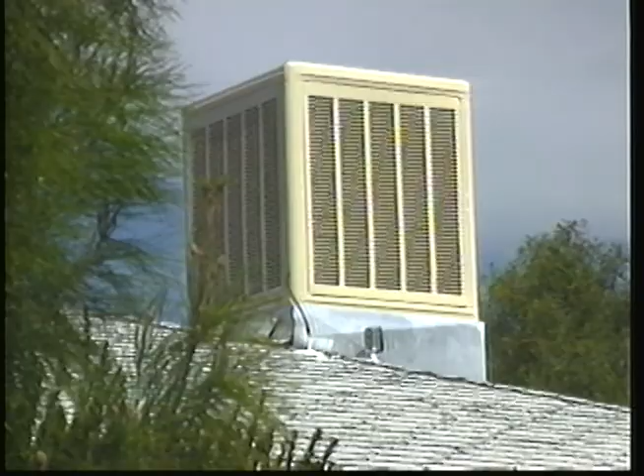Evaporative coolers work in very much the same way. Water passes through a fiber medium or pad. Air is pulled through this pad and evaporates the water. As the water is evaporated off, the air becomes cooler. Evaporative cooling is nature's way to cool.

Evaporative cooling is a simple process, and it can be used to cool large areas like warehouses, restaurants, offices, and even the home in which you live. Here's how a cooler can be used to cool your home.

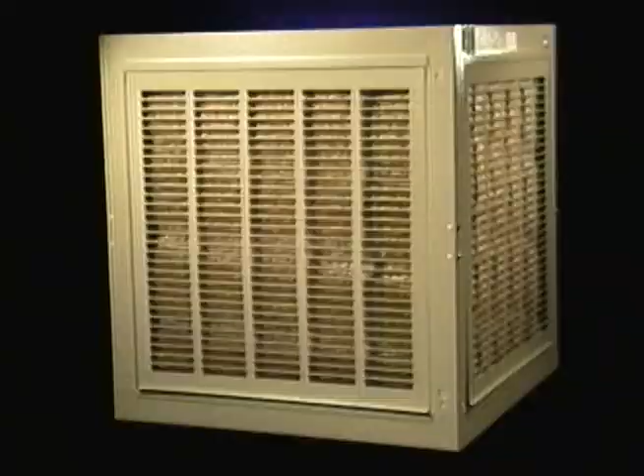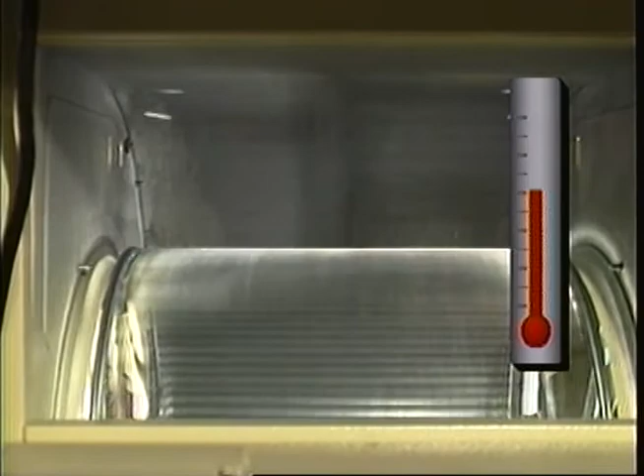Water dampens the cooler pads. Air is drawn through the pads and evaporates the water. As it does, the air is cooled and moisture is added. This air is anywhere from 25 to 30 degrees cooler than the outside air temperature. This provides a comfortable environment in which to work and live.

Unlike air conditioning, doors and windows do not need to be kept tightly closed for evaporative cooling to work. In fact, doors or windows will need to be open a certain amount. The key to the best use of evaporative cooling is air exchange. Fresh air in, stale old air out. Up ducts can be used in place of open windows or doors to vent the air through an attic. In either case, venting should have 2 square feet for every 1,000 cubic feet per minute.

Evaporative cooling allows fresh air to be constantly circulated through the home, removing odors, smoke, heat, and pollutants like radon gas. Air conditioning recirculates stagnant air over and over while cooling to an acceptable level. Any heat introduced into your home from cooking, body heat, washing, or electrical appliances makes your air conditioner work even harder. Evaporative coolers simply push this hot air out of the home.

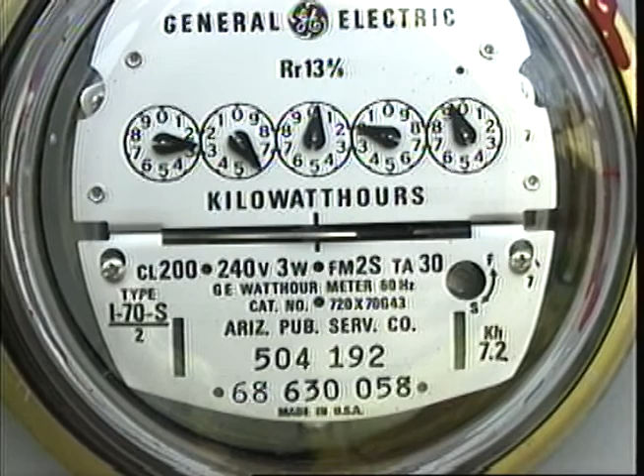Evaporative cooling will not only provide you with comfort, but will be comfortable to your pocketbook as well. You can expect utility costs to be up to 75% lower compared to the costs of using an air conditioner. Don't forget, air conditioning repair visits can cost upwards of $75 an hour.

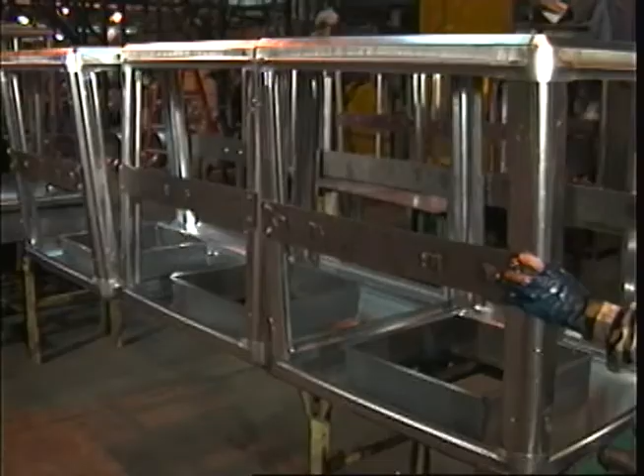When you look inside, you'll see why the industry's best coolers come from Phoenix Manufacturing. Our cooler cabinets are made from domestic galvanized steel and prepared through a 5-step cleaning and phosphatizing system. This system is the most advanced in the industry. In the final stages, the steel is rinsed with pure, filtered water and sealed to provide further long-lasting protection.

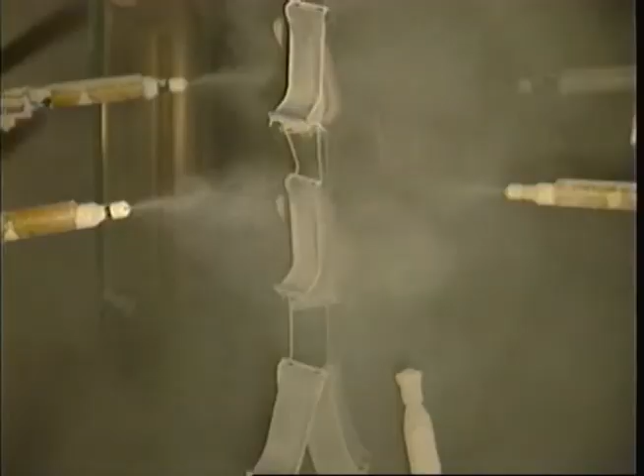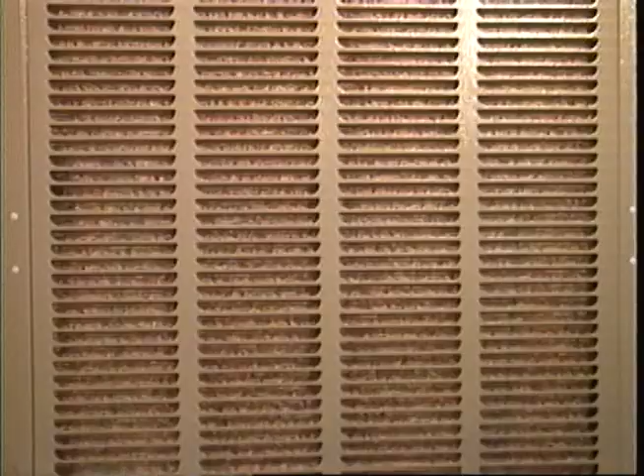Then a final protective powder coating called Peblar XT is added to the surface of the steel. This coating is the highest quality and most costly outdoor finish used in the industry. This multi-layer bonded treatment protects your cooler against rust, chalking, corrosion, and ultraviolet weathering. A less expensive coating method could be used, but Phoenix Manufacturing would rather make a quality product that will last than cut costs to make an inferior product.

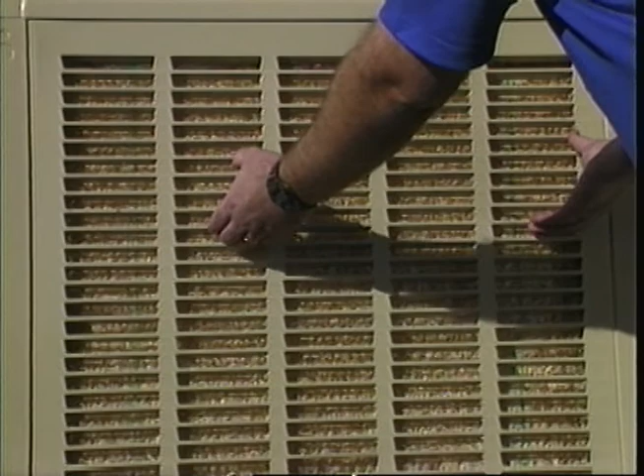For easy maintenance, each cooler cabinet is equipped with latch-free slide-in pad frames. You simply lift one up and out of the cooler for easy access to the cooler pad and housing. Each pad frame is deep louvered to provide for maximum cool air delivery.

The cooler pads supplied with the Phoenix Manufacturing evaporative cooler are made from strands of aspen, a wood fiber. Each pad provides an excellent medium for evaporation, suspending up to 20 times its weight in water, and also providing a pleasant fragrance when air is drawn through and passed into the home.

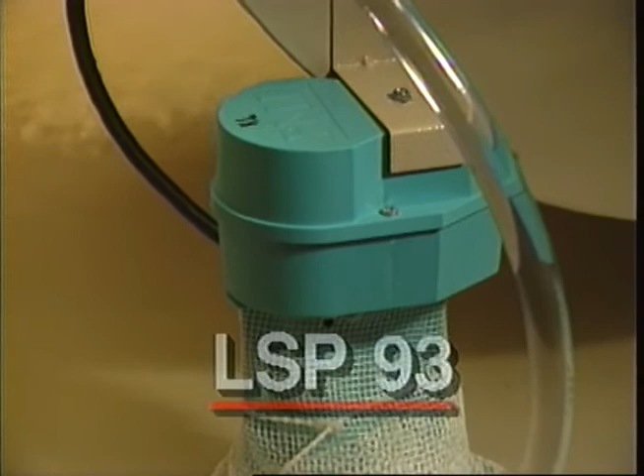The water is fed to the pads by a pump in the bottom of the cooler, surrounded by a protective mesh screen. Phoenix Manufacturing uses the new LSP-93 low sump pump. The LSP-93 is the most powerful pump on the market today. This pump will perform with no loss of pressure at any water level. You can be sure the pads of your cooler will remain wet for optimum cooling.

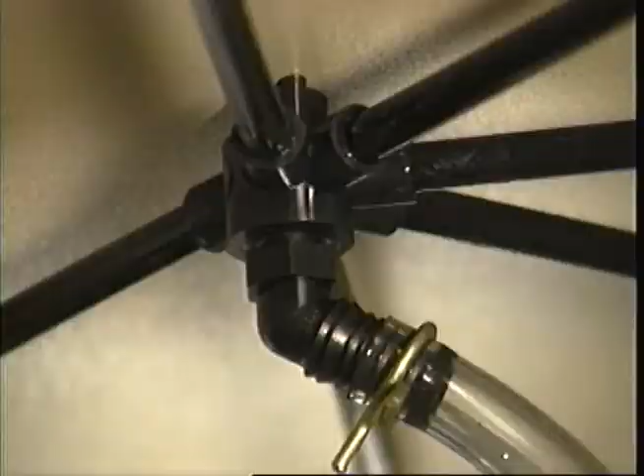The water from the pump travels through a pipe that feeds a self-metered water distribution system. This system evenly supplies water to the drip trough located above each of the cooler pads. Supplied with every Phoenix Manufacturing cooler is a bleed-off kit. This kit is recommended to ensure continuous fresh water and reduce mineral deposits on cooler pads.

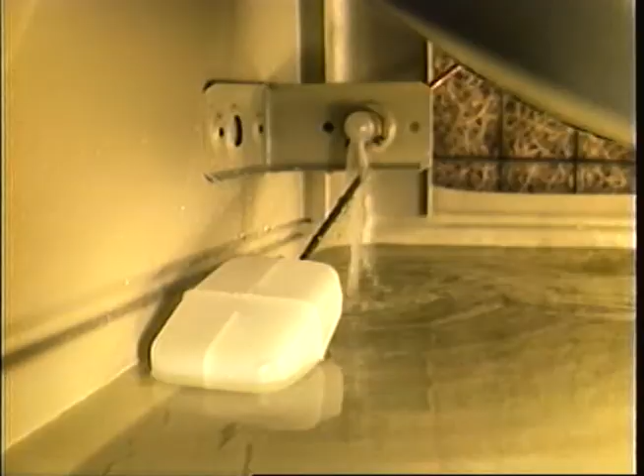To maintain a proper water level in the bottom of the cooler, Phoenix Manufacturing provides a quality float assembly. The water supply is connected to the float valve to keep the water at a proper level for operation.

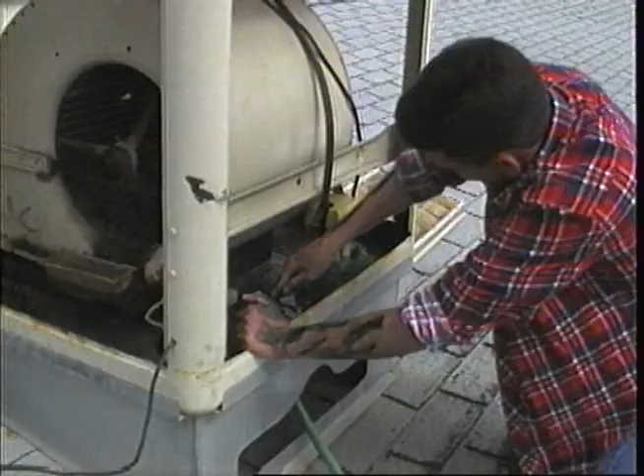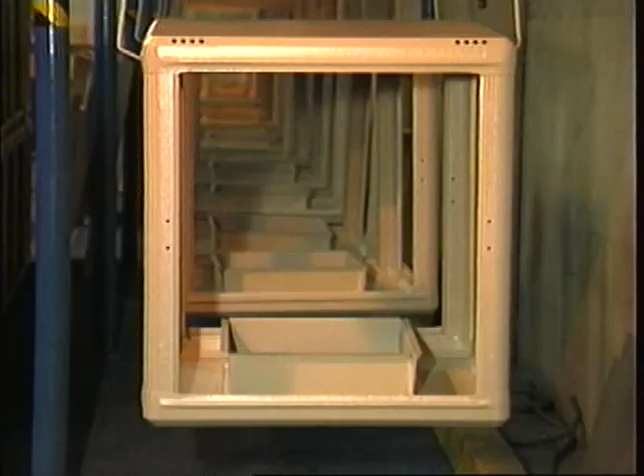Many competitor models and older coolers require you to coat the bottom with a tar or other sealant at the beginning of each year to reduce corrosion and rust out. The bottom of a Phoenix Manufacturing cooler should require no additional coating for a number of seasons. Phoenix Manufacturing coolers have a multi-layered finish to protect against corrosion and rust. In fact, Phoenix Manufacturing is so confident that our coolers are corrosion and rust protected that we provide a 5-year warranty on bottom pan rust out.

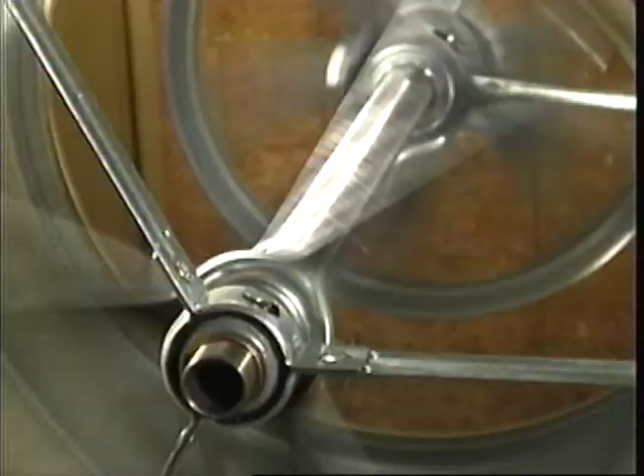The blower housing is constructed from the same galvanized steel and finishing materials that make up the rest of the cooler. The 3-point die-stamped bearing mounts ensure that every Phoenix Manufacturing blower wheel is perfectly aligned for the quietest operation. The blower shaft is 1 inch in diameter to provide maximum strength and quiet operation. Competitors and older models typically use only 3/4 inch shafts.

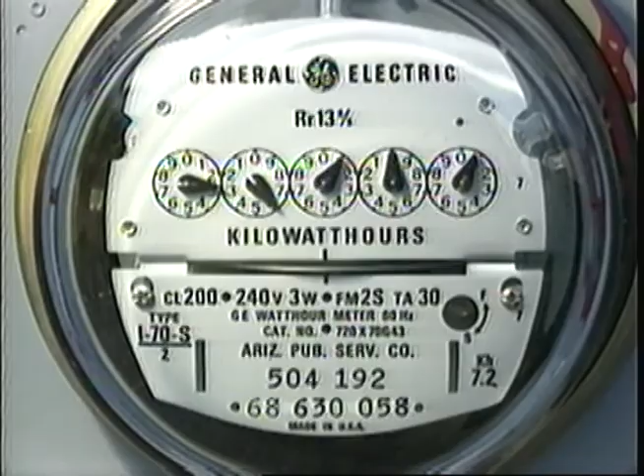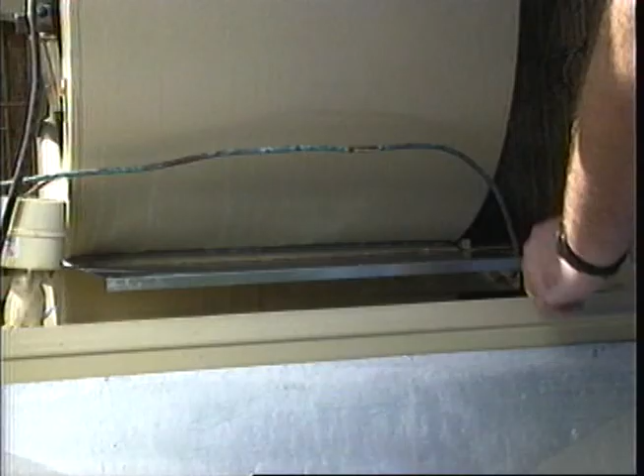Motors used in evaporative coolers use far less energy than air conditioners. Phoenix Manufacturing evaporative coolers cost less than $1 a day to operate, while a typical air conditioner costs over 5 times that amount. All electrical connections are made at the junction box, allowing easy plug-in connections of motor and pump. All Phoenix Manufacturing motors and pumps are recognized by Underwriters Laboratories. And for those winter months, a slide damper is provided to prevent heat loss.

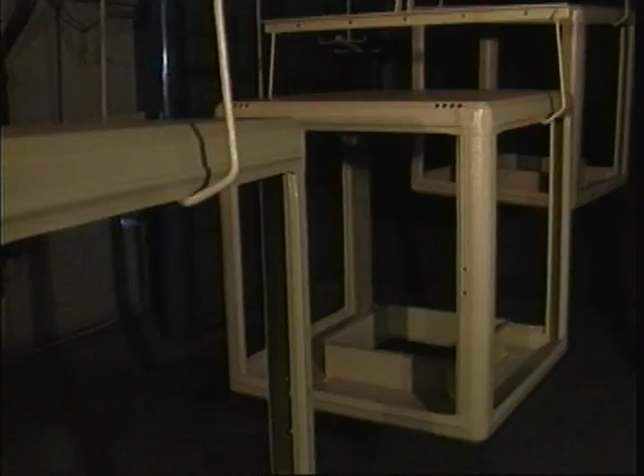To provide the highest quality product, Phoenix Manufacturing uses a variety of quality control checks. Each day, a representative number of finished units are taken apart and tested for consistency and quality in the production process. After every run of 50 units, 3 mechanical checking methods are performed to ensure a quality finish. Ongoing tests are performed, exposing panels to salt solution for 1,000 hours.

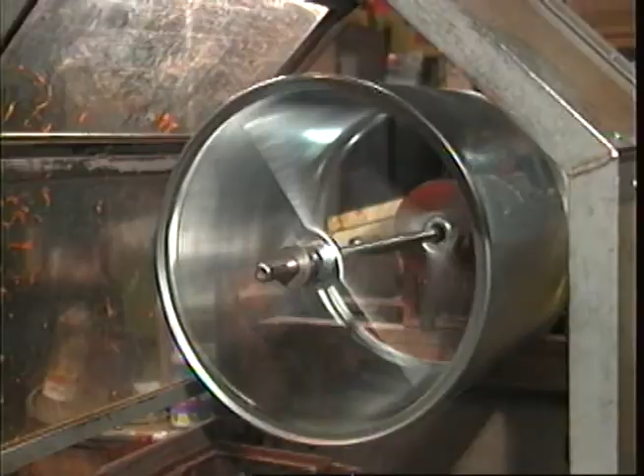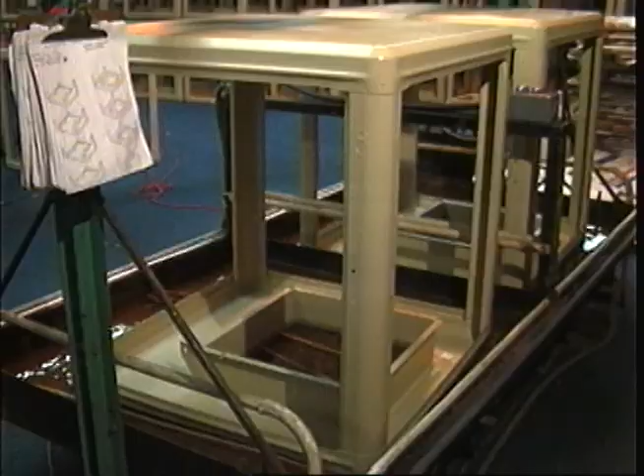Like the wheels of a sports car, every blower wheel is dynamically balanced and rechecked using a high-speed rotation and vibration test to ensure the quietest operation for years to come. And before any cabinet leaves the plant, it is 100% leak tested. This test is performed in a controlled and timed submersion tank to prevent the possibility of operator error. As you can see, a Phoenix Manufacturing cooler is well designed, properly equipped, and thoroughly tested for your comfort in installation and everyday use.

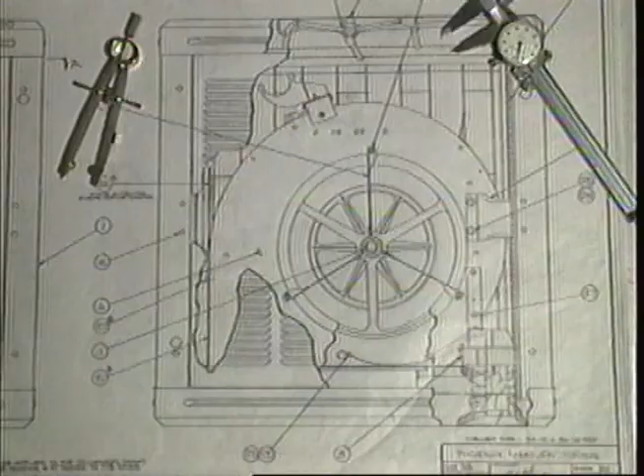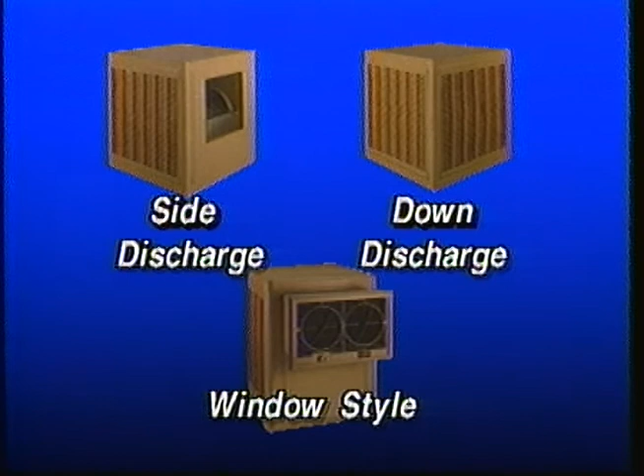When deciding what kind of cooler to buy, you'll need to determine what style and size of cooler will fit your needs. First, decide whether you'll be using a side discharge, down discharge, or window style unit for your home or building. Next, determine the size cooler you'll need. Sizing a cooler is a simple process. First, determine the cubic footage of your home or room to be cooled. Simply multiply the length by the width by the height and divide by 2.

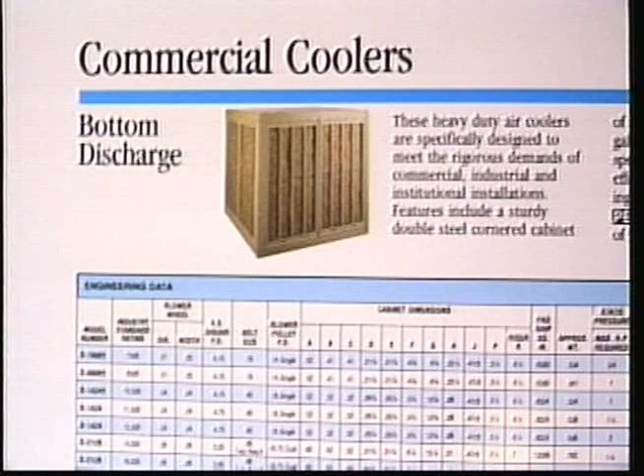For example, if you're looking for a down discharge unit and have a home that is 60 feet long, 20 feet wide, and 8 feet high, you would need a cooler for an area 9,600 cubic feet. Divide this number by 2 to determine the cubic feet per minute, or CFM. In this case, you'll need a 4,800 CFM unit. In each case, to find the optimum cooler for your application, you should refer to the sizing charts found in a Phoenix Manufacturing catalog. Always choose a cooler that delivers a CFM that is equal to or larger than your needs. This will ensure the best cooling possible.

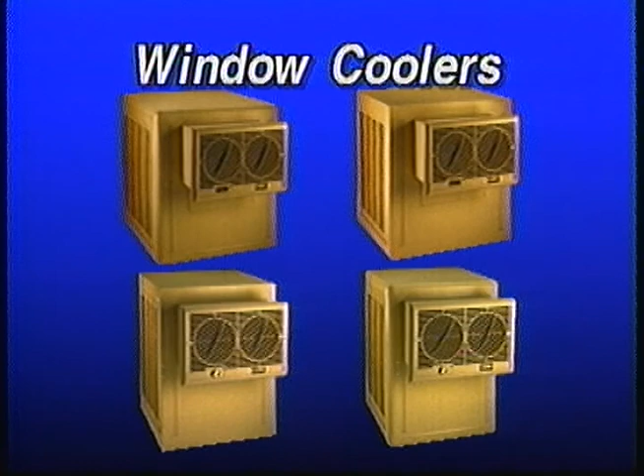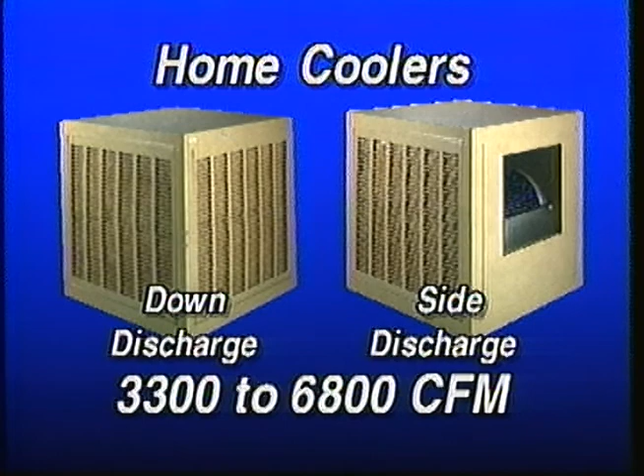Standard window coolers from Phoenix Manufacturing are available in 4 models, ranging from industry standard 3,300 to 4,800 CFM, and include a duct and grill, 2-speed motor, standard parts as other models, window filter panels, and internal wiring. There are 6 models of down discharge and side discharge units, with each model available in 1 or 2-speed units for home use, ranging from industry standard 3,300 to 6,800 CFM.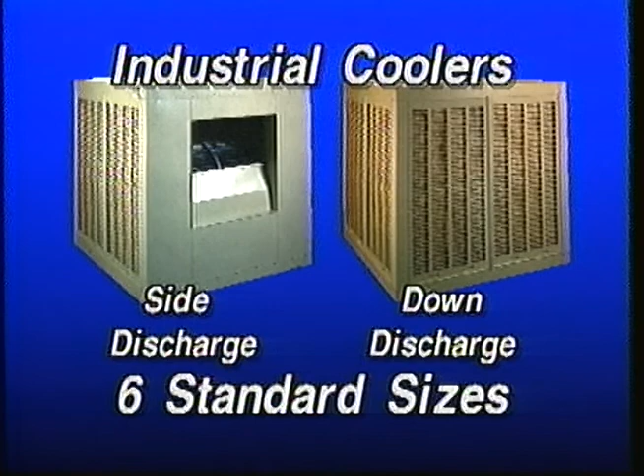Industrial side and down discharge models offer you a choice of 6 industry standard sizes, ranging from 7,800 to 21,000 CFM. Complete specifications and sizing information is available from Phoenix Manufacturing or your local distributor. Your local contractor or dealer will be happy to assist you.

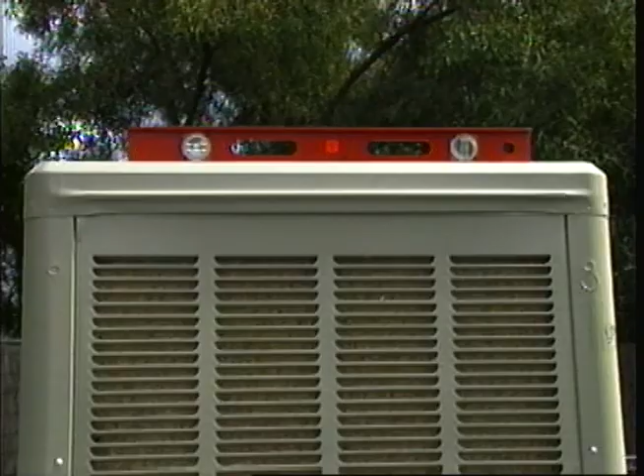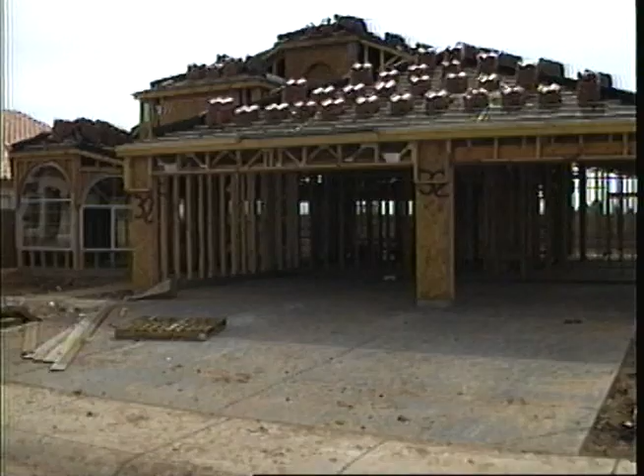Placement of a cooler will depend upon the structure's design and construction. Depending on your ductwork, coolers may be mounted at the side of your home or on the roof. In either case, the cooler must be leveled for optimum operation. Don't do this. Most homes will easily accept the use of an evaporative cooler system, but check local codes for proper installation. In some instances, you may already have air conditioning and wish to have evaporative cooling for part of your summer season. Side-by-side installation will provide you with the optimum cooling for your comfort and pocketbook.

The initial cost of installing a Phoenix Manufacturing cooler is far less than the cost of an air conditioner. Installing a typical 3-ton air conditioning unit requires a crane and crew to place the unit. Installing a Phoenix Manufacturing cooler is a simple task that 2 people can do. Installation instructions are supplied, so you can do it yourself. Or, as most people prefer, you can hire a professional licensed contractor to install a unit for you.

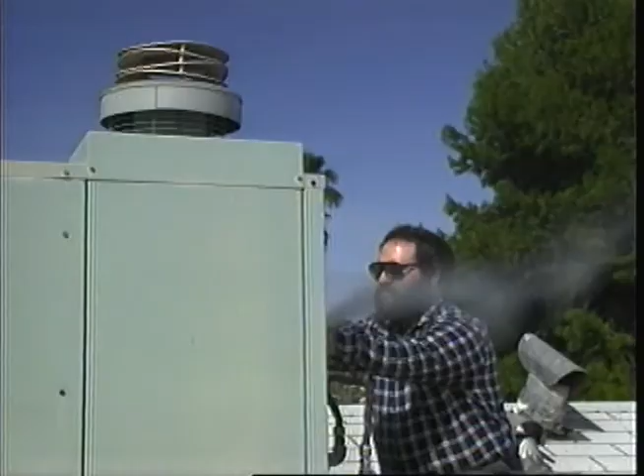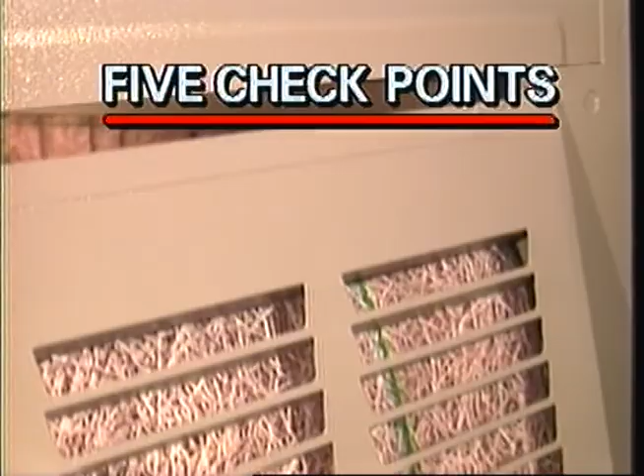Cooler maintenance is easy when compared to air conditioning. Air conditioning units require a costly, certified maintenance person, while an evaporative cooler can be maintained easily by the average homeowner. There are just 5 simple checkpoints required throughout the season. First, replace the aspen pads about every 2 or 3 months throughout the season. Clean the water pump and filter cage at the start of the season. Lubricate the bearings at the beginning, middle, and end of the season. Adjust the belt tension twice a year. And drain and clean the bottom of the pan at the end of the season. It's as easy as that.

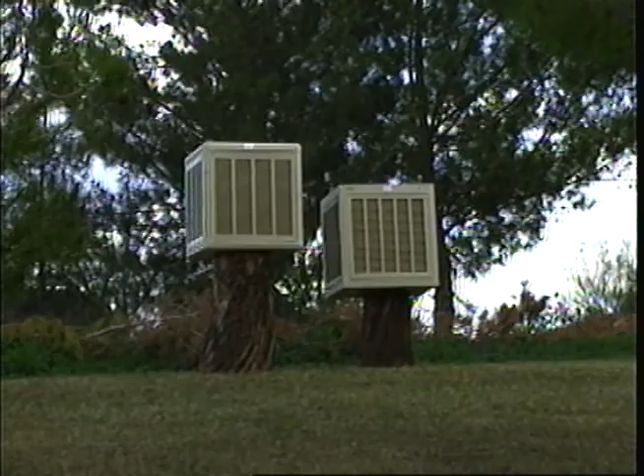Phoenix Manufacturing wants every customer to be satisfied with their purchase. All Phoenix Manufacturing coolers have a 5-year warranty on bottom pan rust out. There's also a 1-year warranty on all parts except the aspen pads. With Phoenix Manufacturing, you know you'll have the best evaporative cooler for the job. It's nature's way, providing comfort and savings for years to come.